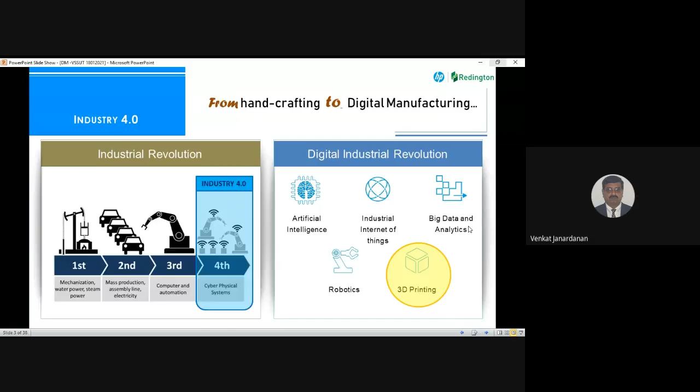All these manufacturing modes will be available, and people started realizing the value of 3D printing and recognizing it as another alternate mode of manufacturing today. The growth we were able to achieve, and how we achieved it, is something we are going to discuss. The primary objective of all this is to achieve higher capital efficiency. If I want to save money for the company or increase the profitability of my business, the first thing I need is rapid innovation and to bring products much faster into the market.

Mainly because the market is becoming more and more competitive. It is becoming much more demanding. People are also expecting new products to come into the market at an earlier date, so that they will be able to get it. So if you look at the mobile market, if you look at the speed at which new models are coming up from different companies and how competitive it is becoming, that sets the trends for the market demand today. So the market is expecting that kind of a turnaround of new products into the market.

Second way of achieving capital efficiency is basically shorter delivery time. When I start a project, earlier days, if you look at the time of Ambassadors or all these cars, there is a design time which is much longer. And after completing all the design, they will manufacture the tools which are required for mass manufacturing. Then they launch the product, and the next batch of product or next modification of the variant of the product comes after a very long time, mainly because it takes a longer time for really setting up the plant, getting to the manufacturing mode, and bringing the product out to the market. So I think we can't afford to take that much time today to design and deliver a new product or new series of equipment.

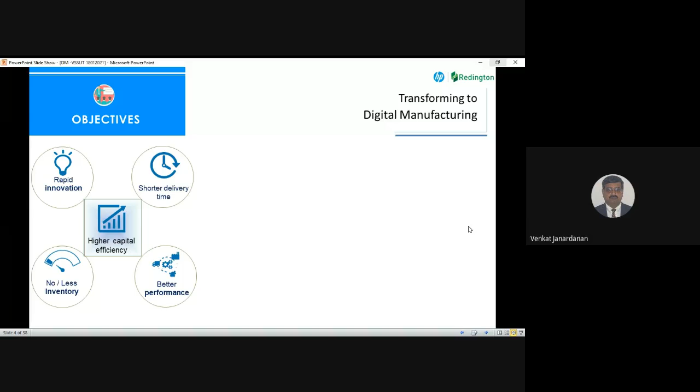So today, if you look at it, people are moving away from standardization. If you look at the time of Ambassadors and all this kind of stuff, we have a standard model, and that model is getting sold in the market. Today, people are speaking about customization and personalization. So more focus is getting shifted into customization and personalization. Second thing is basically heavy devices into ergonomic and lightweight devices. If you look at the evolution of electric cars or something of that kind, what we are looking at is basically making it as lightweight as possible, so that we will have the maximum efficiency achieved out of the system.

Third is the manufacturing constraints. When you are doing a design using injection molding or CNC or any other alternate manufacturing, what happens is basically you have to design the product for its manufacturability. So for example, if you look at injection molding, we have to really put a lot of effort in getting the right flow patterns while we are doing the molding, or draft angles have to be defined in such a way that we will get the maximum quality for the product. So there are design constraints with you.

Or if you are looking at CNC machining, we need to think about which machine is going to manufacture this, whether it is a 5-axis machine or a 3-axis machine, and my design has to be in line with the manufacturability of that part. So all these constraints have to be removed at one point of time. We need to have a free-form design. So that is something which people are looking at today, because I cannot work with constraints. I want to work freely and do designs freely. So the market today is transforming into these stages, and that is where 3D printing is going to add a lot of value for you in the whole scheme of things.

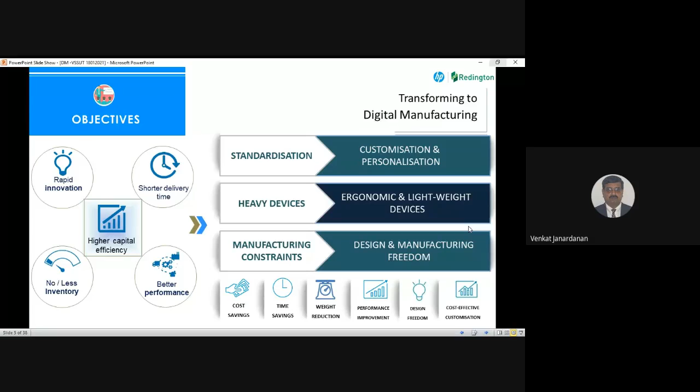Now, if you look back, these 3D printers have been available in the market for almost 25, 30 years. And these 3D printers are commonly also called rapid prototyping, and also called additive manufacturing. So all these terms lead to one thing, basically a layer by layer creation of your 3D part. That is exactly what 3D printing or additive manufacturing or rapid prototyping is about.

So if you look at a CNC machine, what we are doing is actually taking a block of wood, subtracting the areas where we don't need it, and creating a geometry out of that box. Here, what we are doing is we have a 3D model, and if you slice an apple and rejoin the slices like this, the geometry we get is an apple, right? Similar way, we are taking a digital 3D model, slicing it layer by layer, and constructing it layer by layer, one over the other, and creating a 3D model out of it.

That is the way the 3D printer works. So it is a layer by layer construction from the bottom or from the top, where the geometry is achieved by adding layer over the layer to get you the 3D Z axis direction. So that is what is called additive manufacturing.

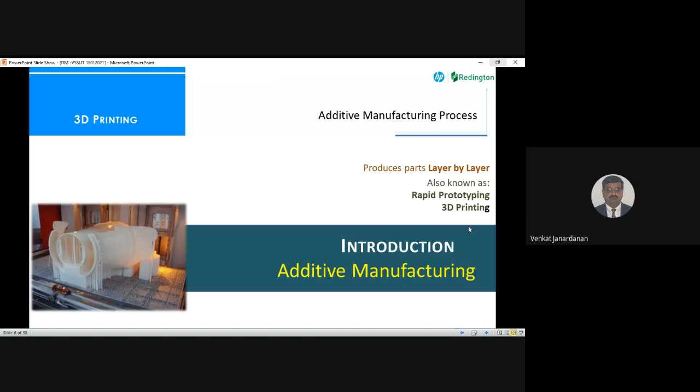Now, if you look at the history, this is available from 1986 when Charles Chuck Hull invented this SLA technology, and he commercialized it in 3 years' time, and he started a company called 3D Systems. Then came the FDM, the most commonly used 3D printers, the fused deposition modeling 3D printers, which came in 1989, and after that, technology over technology started coming in, and the latest technology which is available right now was launched by HP in 2017. That is basically what we call the multi-jet fusion technology.

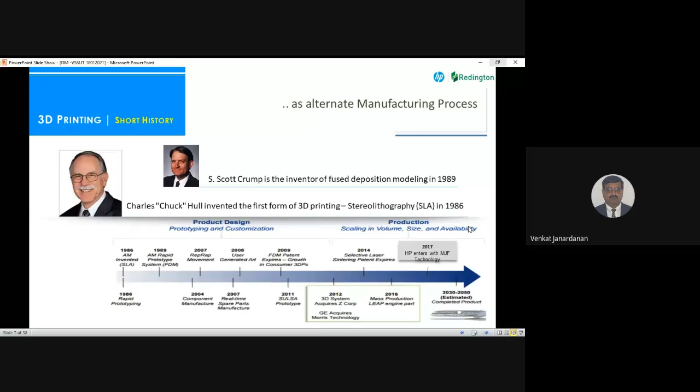So we have seen a lot of new technologies coming into the market. The basic nature is layer by layer construction, and each has its own characteristics and different way of thinking. So if you look in a little detail into the industrial 3D printing technologies available in the market, we have the FDMs, we have the polyjet, that is basically jetting technology after inkjet technology came in 2D printing. If you look at FDM, what they do is a fused filament is getting deposited using a tool path.

Something like in a CNC machine, a tool will remove the material from a block of material, whether it is aluminum or steel or plastic. So the same tool path is followed, but instead of removing the material, it just keeps depositing this material, like when you create a jalebi. You're just creating a layer over the layer and creating the jalebi. Similarly, the FDM extrudes the material wherever the material deposition has to happen. It follows a tool path and deposits it. That is the technology called fused deposition modeling.

When you look into polyjet, what it does is basically like an inkjet 2D printer. In the inkjet 2D printer, you will be jetting the inks wherever it is required, whether text or image. It jets the ink at that location, the specific color, and creates the drawing or the text on the sheet of paper.

In this case, it jets the plastic material, and there will be a lighting source which goes across the platform, and it photocures. A photopolymer is getting jetted, and the UV light which passes through will polymerize the material, and it will become a solid material. And likewise, layer by layer, it creates a 3D model. MJP and polyjet are similar technologies, only two different terms from two different manufacturers.

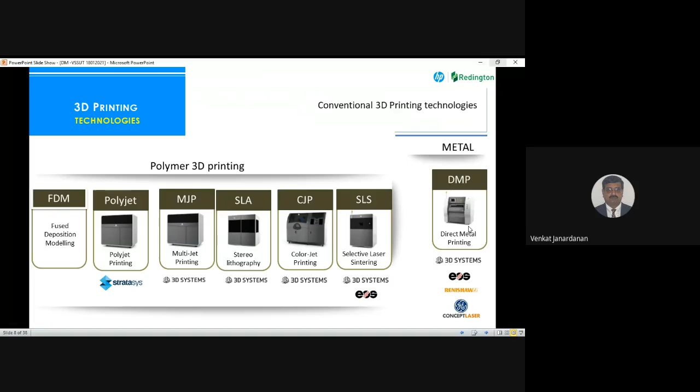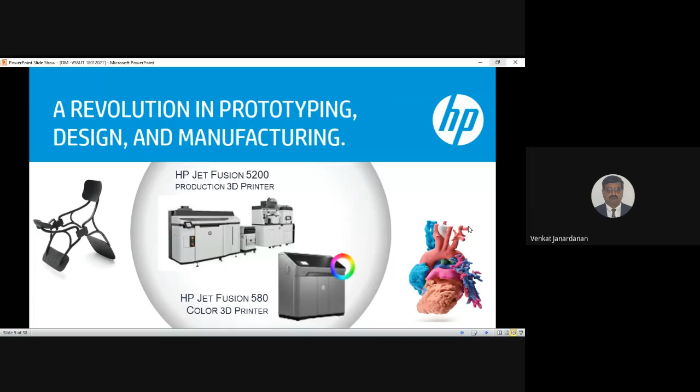So what HP has done is HP came up with a combination of these technologies in 2017. When they launched, they leveraged their expertise in inkjet technology. They use the powder-based technology for just getting the powder. So instead of a laser beam, HP uses the inkjet technology to put something called a fusing and detailing agent, and wherever the fusing agent is getting deposited, that area melts and will become solid. So they have brought in a hybrid technology, multi-jet fusion technology, which is available today and which is the latest of the 3D printing technologies available in the market.

So the advantage of this system is that it is the fastest of the technologies because it needs to spray a layer of powder, and across one movement of the print head, you will have the parts generated. So basically it is what we call a page-wide technology in printing. Then we don't need a support structure, because if you look at PolyJet or SLA or any other technologies, FDMs, they need a support structure because the spraying or deposition of material cannot happen in the air.

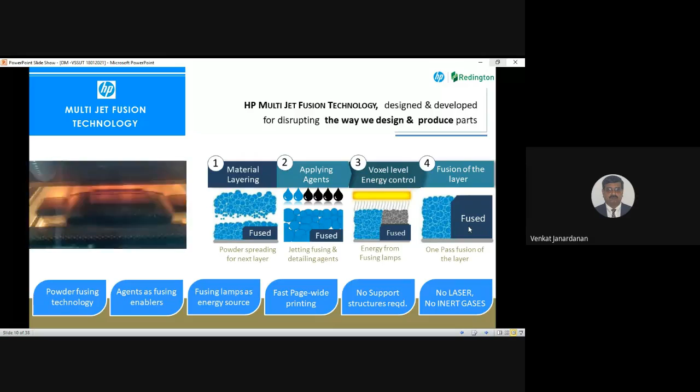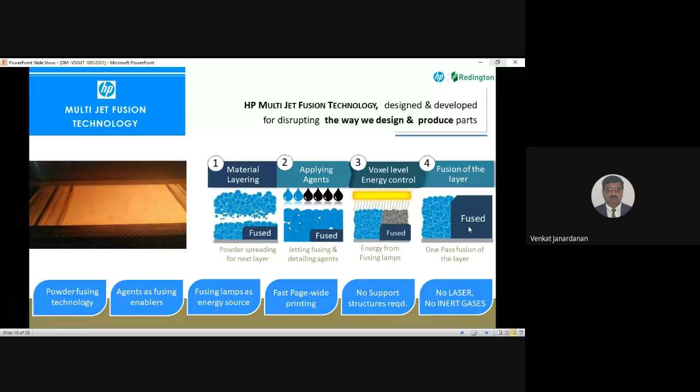Here in this case, since the powder bed acts as a support, we don't need a support material. And unlike the SLS system, we don't need a laser since we are not using any laser or high power equipment. We don't need inert gases, because when the laser goes and sinters the powder, there is a chance of explosion, so we have to fill the complete chamber with inert gases like nitrogen or argon. That is totally avoided here. So this technology has become a very simple technology and the most suitable technology for increasing the speed of production. That is one of the reasons why digital manufacturing has really picked up in the market since the emergence of this technology.

Now, if you look at the machine, this HP 3D printer gives you very strong, durable parts, which are as good as your injection molded parts. Earlier, if you look at SLA technology or PolyJet technology, it is not really using a thermoplastic. It uses thermoset plastics, and the plastics are not that strong to be used as an end-use part. For example, if I want to print a part and use it in a car as an interior or in an aircraft as an interior part, or for packaging, or really use it for the end function, that may not be possible with the PolyJet or SLA technologies because these are all epoxy plastics and not real thermoplastics which you use for engineering manufacturing.

So this technology gives you really strong durable parts which are suitable for end use, and it also gives you isotropic parts. What I mean is that in the X, Y and Z direction, the strength of the part is going to be the same. If you look at FDMs or other 3D printing technologies, since they create layer by layer and there is a time gap between the layers, the bonding between the layers will not be as good as your injection molded part. But this technology is quite comparable with injection molded parts because along the Z direction we will also be able to achieve the same strength. That is why they are called isotropic parts.

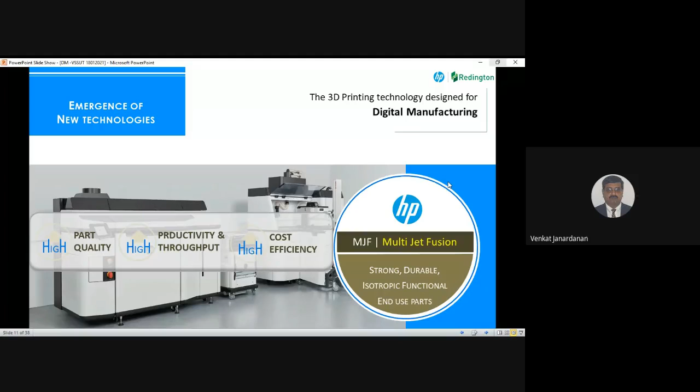Now, this equipment has also been designed for high-speed and high-volume printing. They designed the equipment as 3 different components, and these 3 components make the system usable 24/7 uninterrupted. For example, the printer's job is only printing. We have a separate unit called the processing station which handles the powder, and the build unit is the interface between the processing station and the printer. So if I have multiple build units, I don't have to stop the machine. Once one print is out, I can take out the build unit, insert the second build unit, and start printing the next job. So uninterrupted, I will be able to generate output from the printer directly. That is one of the reasons why the throughput is very high on these machines, and it is the most suitable product for your production environment.

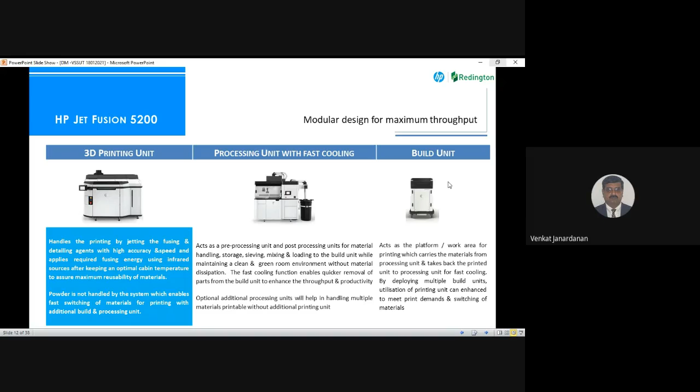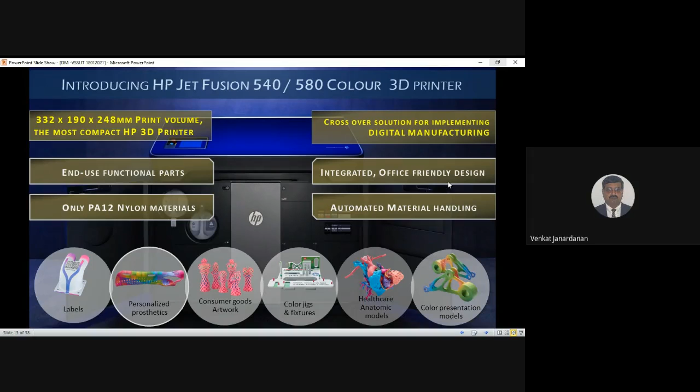Now they also have a color printer, the 580 series, which gives you a true color picture. So HP leveraged their technology in terms of getting the color combinations right on the parts, and millions of colors can be generated by mixing CMYK inks. The same technology they use for 2D printing, they have deployed here also with the color agents, and you will be able to generate color parts out of this machine.

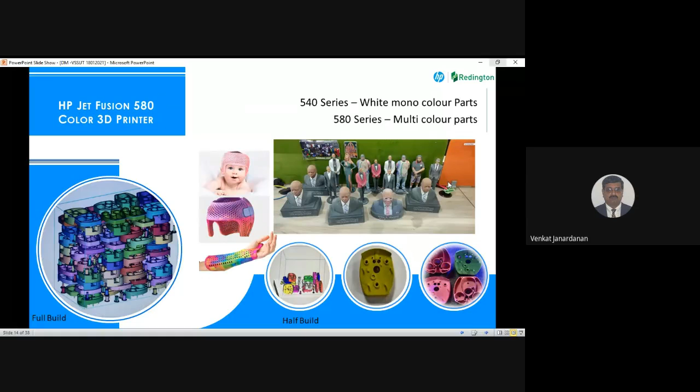So if you look at 3D printing, there is a revolution happening today where we are getting strong parts out of this printer. We can also generate true color parts from this, and these parts can be used as your complete 3D manufacturing printer.

So why we are able to really analyze these competitive technologies and speak more about the 3D printers is mainly because as a team in Redington, we have the complete range of 3D printing solutions available in our office. For example, I have all three series of printers from HP on sale available, where we are using them for production in our facility.

We also have an SLA machine, an SLS machine, a few FDM machines, a polyjet machine, and a multijet. So whatever technology we speak about, except for the metal 3D printers, I have the complete range of 3D printers available in our facility, where we are quite experienced in operating them, seeing the benefits, and we also interface with customers to see the merits of each type of 3D printer.

That is one of the reasons why we can authentically say this printer can do this job, this printer cannot do this job. We are able to tell you mainly because for over a decade we have been using these machines, and we have been using HP machines for the last 3 years.

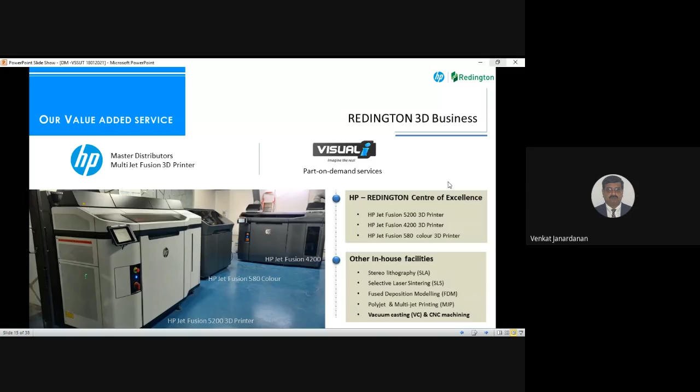Along with that, we also have vacuum casting, the conventional rapid prototyping tool, and CNC machining. So we have a setup where we operate a production environment in our office, and we are able to speak more about all the technologies mainly because of our experience with all these series of 3D printers.

Now, from our experience, what we could see in the market, conventionally in the last 25 to 30 years that 3D printers have been in the market, most customers have bought these 3D printers only for prototyping jobs, mainly because the speed and throughput are not good enough for their production jobs. Second, the part quality and the material don't suit, because polyjets, SLAs and these 3D printing technologies will give you prototyping parts, only for look and feel and not as functional parts.

And the value proposition: the production cost of most of these technologies is much higher than your normal production cost. That is one of the reasons why we are not able to port these machines to a manufacturing environment, and for the last 20-25 years they have been lying in the prototyping market. Today, what we are speaking about with HP is a drastic change in the way we approach the market, and we are speaking about digital manufacturing using these new technologies.

For example, look at the speed and throughput. HP, with the modular design, in 10 hours is able to manufacture a complete full bucket. And as the number of parts increases, it will not impact the time of printing.

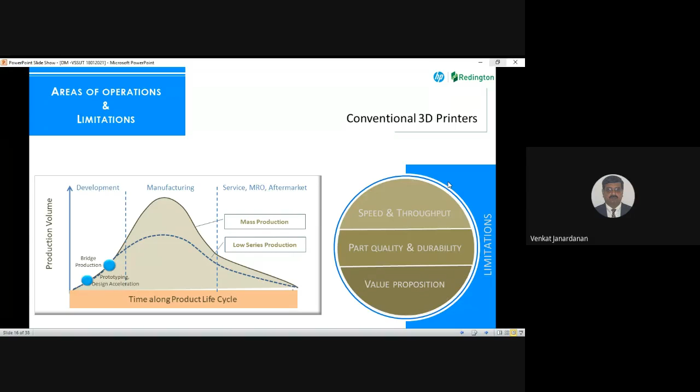Now, what the market is also looking at is, say for example I'm launching a new product, I want to understand how the market is going to respond to that product.

I don't want to commit myself into crores of investment for the tooling. So what people are thinking about is, let me launch 500, 1,000, 2,000 parts now in the market. Let us see how the market responds. In the meantime, if I want to do some improvisation on the design, my designers can also do the improvisation as per the market demand.

And the next 3 months, or next 6 months, 8 months down the line, I can invest on the tooling and enhance my production once the market demand increases for my product. So that is something which the market is really thinking about now, because if I want to launch a product after tooling, I have to invest crores and crores of rupees. But if I can avoid the tooling part of it and do a soft launch with these designs 3D printed, that will end up much more economical for me.

So if it is successful, I can always switch over; the same design can be ported after making some tools. If it's not a successful model, I can supply the 3D printed spare parts in the market. I can change the design and relaunch the product with a new design, and as per the success, I will be able to generate tools accordingly. So likewise, with a lower risk, with a lower investment, if I am able to launch a product, that is the best way of doing it.

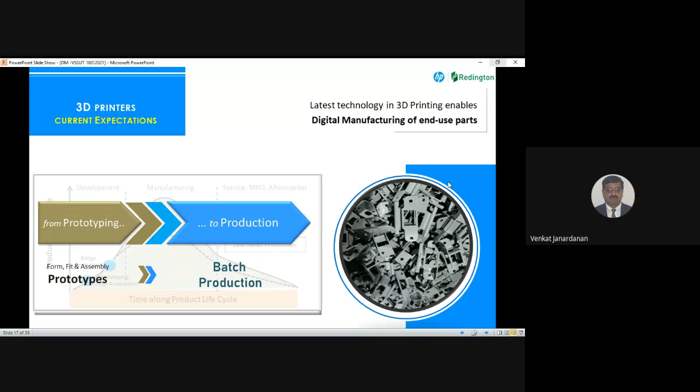Now, to get a little detail into this, the applications which we can focus on are basically personalization and performance optimization. I have launched a product. I need to relaunch that product with some improvisation or performance optimization. I can do that using 3D printers. Or if I want to really do a generative design using lattice structures and optimization of the design using the software tools, I can do that and get it printed, which may not be possible with conventional manufacturing.

If I want to have only a few thousands of parts manufactured in a year, for example, in tractor manufacturing, there are tractors which may sell 30,000, 40,000 in a year. A few variants, for example, a few demand an air-conditioned chamber for the tractor. It may sell only 2,000, 3,000 a year. So the air-conditioned part can be digitally manufactured rather than getting into the tooling, where the HVAC can be designed, 3D printed, and on demand manufactured and fitted onto the vehicle. As the volume picks up, I can always go for the tooling.

So likewise, if I want to have variants, or improvised designs to launch into the market, I don't have to get into the conventional way of manufacturing by investing on tools. I can always go with a 3D printed part for a certain volume, and then switch over to mass manufacturing mode whenever required. So the value addition we are going to give in the industry is basically low volume production, complex designs and geometry, integrated designs, and creating a value proposition for that kind of components. I am not speaking about a part manufactured in millions, where tooling will be the most economical way of manufacturing.

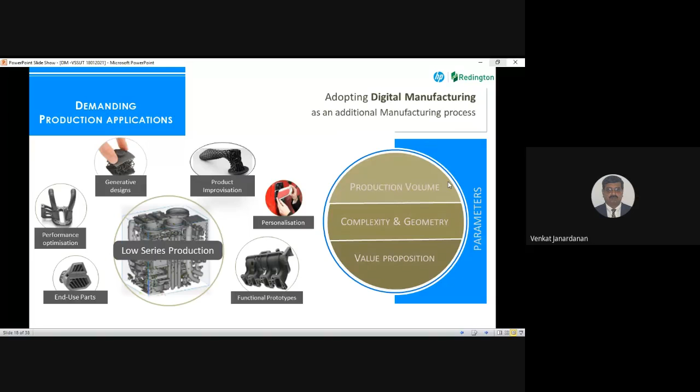Now, if I want to really get into a transition to digital manufacturing, as I told you, each and every component of my product cannot be manufactured in 3D printing because it may not be viable for you to do that. So what we are speaking about is basically you have to have the right technology as per your demand to manufacture, depending upon the material, depending upon the speed at which you want it, the volume of parts or the number of parts you have to manufacture in a year. According to that, you may have to really choose a technology for that.

Second most important thing is, don't try to put everything into 3D printing. Whatever you feel is commercially viable, make the design modifications which are required for that. So depending upon the application, depending upon the design, you can choose which manufacturing mode will be more economical for you.

And third is basically, normally in the prototyping market, I will design some products or some components or child parts for manufacturing in injection molding. And then, since soft tooling or mold and production might be a long duration job, or might be more expensive, I will share the design to the market and ask them to get a 3D printed part.

And when I get a 3D printed part of a design which has been designed for CNC machining or for injection molding, what happens? The design is done for something else, and the manufacturing mode is something else. So the value proposition will not be right. So if I decide that these are the components which I am going to do using 3D printing, then why can't you design it for 3D printing? Why do you want to design it for alternate manufacturing and then print it?

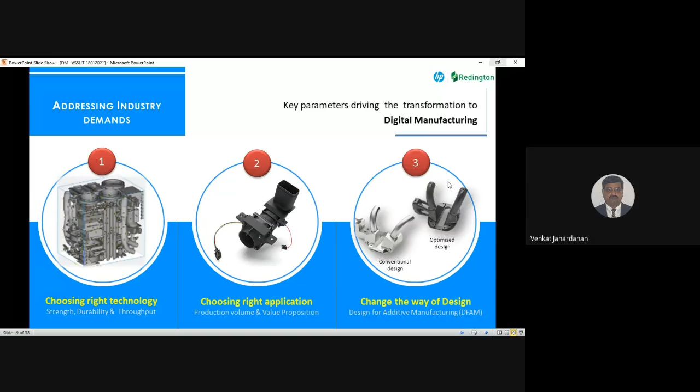So spend some time, modify your design for 3D printing as per the parameters of 3D printers, and then start producing those parts using a 3D printer. Then you'll be able to establish the value proposition, mainly because of your design changes, probably a material saving, probably some sort of part consolidation. All these things are possible when you start designing for 3D printing. So these are the three key areas which I am going to discuss in the coming slides.

So what we are speaking about is choosing the right application. When you choose the right application, what are you designing? Is it basically a functional prototype where you want to do the testing? We have done some projects in the market where almost 300 cars were running with all the inside lock assemblies and outside lock assemblies 3D printed, because they wanted to do a pilot launch or test run of these vehicles across the environment and see the performance of the engines or of certain components.

So they have done a new platform of design in a car, and they have opted for 3D printed parts wherever they can fit, so that they don't have to go for soft tooling, to reduce the cost of this pilot, these alpha beta launch parts, or what we call development parts.

Similarly, for example, if I want to personalize certain components in my car, or I have a complex geometry for better circulation in my car as per my demand, and I want certain numbers, 1,000, 2,000, 5,000, 10,000 to be printed, I can choose those parts and port them onto this.

Or for example, a company like Ford or Toyota, where Endeavors or these kinds of vehicles are not sold in millions. Endeavors getting manufactured might be around 20 or 30 in a day, where it will not be viable to do the tooling and manufacturing of those low volume parts. So what they do is start importing the parts from the global market. They can avoid that, and they can have the design printed and use it as per demand.

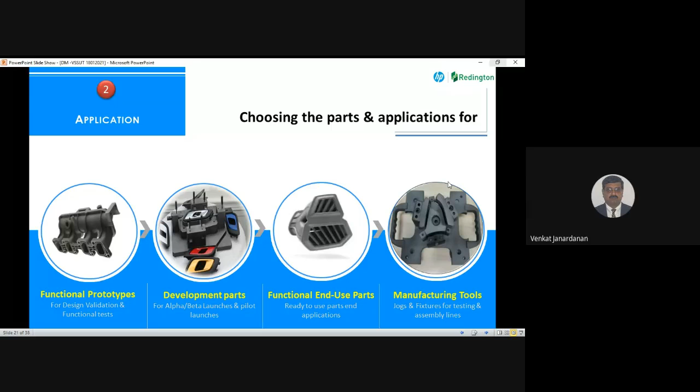Most of these tools you see in the production line are over designed. Can we remove that or replace it with a plastic 3D printed fixture, or an assembly tool, or jigs and fixtures? That is another market which really opens up for 3D printing as a digital manufacturing mode. These are the areas we are focusing on, where we feel that with the emergence of HP 3D printers, we will be able to create a really good impression in all industries using these applications.

You can see the number of parts being made over there. For example, on the right side is a truck IP, the instrument panel, where they wanted to launch 10, 15, 20 trucks for a test ride. You don't have to go for tooling. You can always go with this kind of manufacturing process. In the middle is a checking fixture for your petrol tank lid, where we have done the design. On the left side are the lock assemblies and other components we have done.

The video playing now is a gripper used for a robotic arm. For example, if I have an aluminum gripper, you can assume it will always be an assembly of multiple parts, because machining complex geometries is not possible on a CNC machine, and it will be an assembly fastened together, and the performance will depend on that. You need a lot of maintenance and all this kind of stuff.

The gripper shown here is a single component designed and printed on a 3D printer and works on a pneumatic structure, because as I told you, HP parts are much better compared to any other technology. HP is the technology which gives you airtight, watertight parts, so the functionalities can be operated pneumatically or hydraulically.

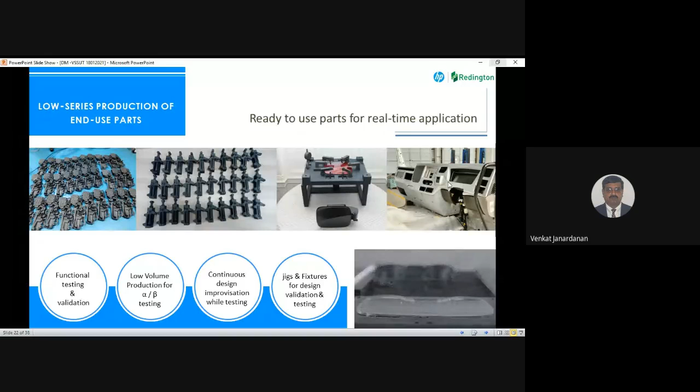The benefits are not only the economy of printing or economy of production, it also reduces the carbon footprints into the market, because I don't have to use this kind of equipment and heavy material. I don't have to really do a lot of post processing and all this kind of stuff. So what happens is basically faster turnaround, as well as for the environment, as well as for the person who lifts the parts and operates on an everyday basis. He will also have less fatigue.

So if you look at the manufacturing tools, whether it is a checking fixture, assembly fixture, or operational jigs. For example, if you are doing painting in a paint shop of an automotive car manufacturer, what happens? You have to keep your door open for doing the painting. So there will be a jig provided, which will be in aluminum. And over the aluminum, they will do some sort of coating of rubber-like material or glue some rubber-like material, so that scratches will not happen on the body.

So likewise, they do a lot of this, and they will take a lot of pain in generating that jig itself. Here, it's a simple task: do an optimized design and use a plastic jig which is good enough to just keep the door open for painting. So likewise, when you walk across any factory, you can see over-designs. You will see inconvenience in the production, mainly because of your current way of thinking and designing.

So, for example, if you look at this end of arm tool, it is completely driven using pneumatics, single print, single assembly, no assembly. It is basically a single unit, works the way you want it. So this is an innovative design which somebody has done and printed on an HP machine to get it implemented in a factory line. So similar is what we are speaking about when you speak about the designs and implementation of this kind of manufacturing tools.

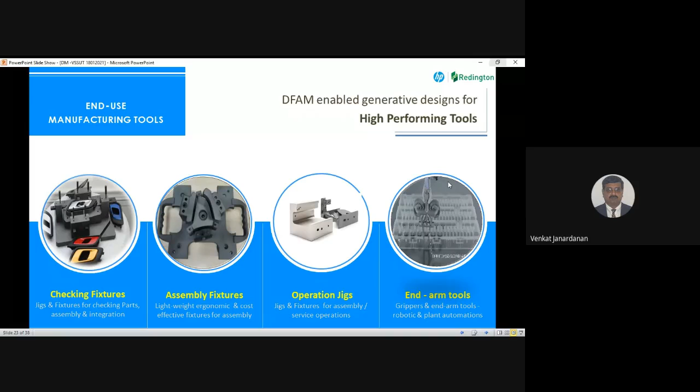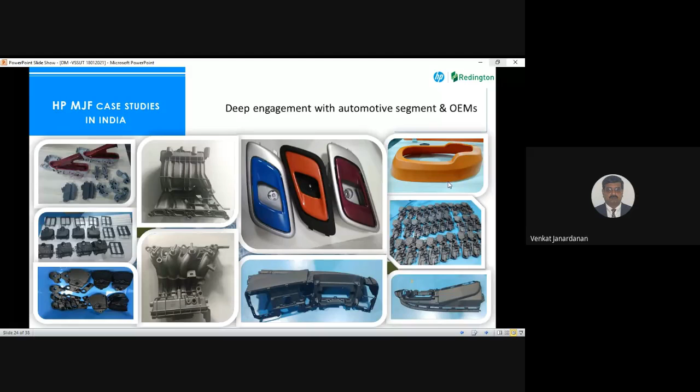Now, if you look at any automotive company, we have done a lot of activities in the automotive industry, because that is one of the predominant industries who uses 3D printing for manufacturing. And we have done a lot of jobs in the market for this kind of thing, including manifolds, external, internal parts, everything. Now, the key component which an educationalist or someone like you has to think about is basically optimizing the design for 3D printing, or changing the way you design it.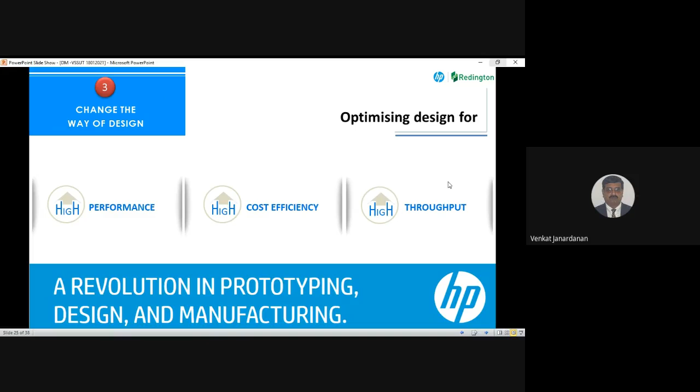For example, when I do an injection molding design, I always get into draft angles and all these components, which are required for designing a component for that. If I go for a CNC machine, depending on the machine availability, I need to really think whether the tool changes, the tools are available, enough access is available, whether I can reach out. My part should not have any undercuts. So like this, I will be working with a lot of constraints.

In this case, in 3D printing, I can do a freeform design. I can manufacture any complex geometry. I can insert lattice structures. For example, I want to make my equipment or tool lightweight. On the boundary or external surface, I can have a solid, and I can think about a lattice structure inside so that the weight of the part will come down. So likewise, I can do designing like topology optimization, part consolidation, lattice structures. I can consolidate all the parts and make it a single assembly to get the functionality.

Or one of the key important things is design for packing. For example, if you are using a draft angle of injection molding, I may be able to manufacture 10 parts in the bucket available. But if I change the draft angle slightly, I will have tighter packing, and the number of parts which can get printed might be 20. So I can adjust the design to enhance the packing and get maximum throughput from one print job. Likewise, I can think about all these parameters when I decide that this part is going to get printed in 3D printing, and I need to design the job for 3D printing.

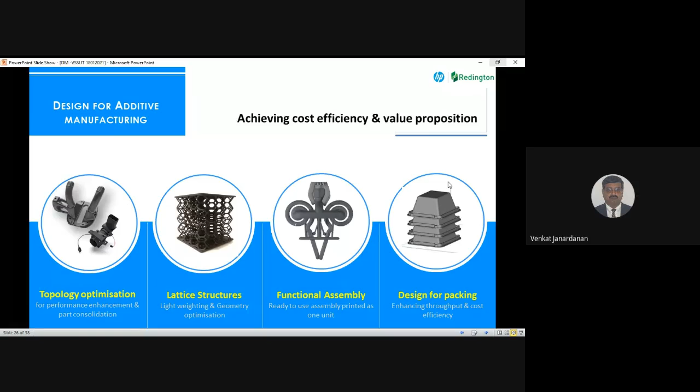For example, if you look at part consolidation, this typical part which I have shown here, if I go for injection molding, it will have minimum 10 parts. It will be an assembly of 10 parts, and you should have separate part numbers.

You should have separate tools to manufacture that, and you have to really maintain the stock of all the 10 components for a long run. Here in this case, all these 10 parts are consolidated into a single unit, printed as a single part, and it carries a single part number for your design. And this is one of the components which is getting used in our HP 3D printers itself.

On the right, it is basically a component which HP uses in their production line to remove the sludges from the printhead manufacturing area, the silicon sludges which come out in the drilling process of a printhead. What it does is it sucks out the silicon and throws it away. The initial design was a 575-gram aluminum part with 8 components fastened together, and every time the sludges would accumulate in the path and there would be blockages. They had to do frequent cleaning.

With all the challenges in front of them, they designed a component to optimize the performance and the design in such a way that it has become a 52-gram part, and this can be printed on demand. So when this part is nearing breakage, just at that point of time they can print the design and use it. So they don't have to stock this either.

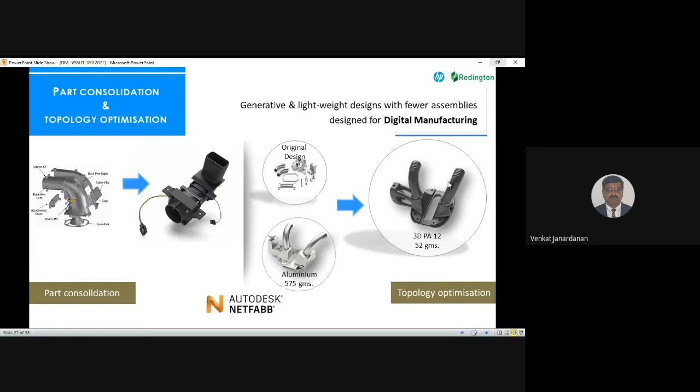Similarly, the packing on the bottom is basically a clip-like fastener which is used in the electronics market, a cable type. When we printed it in the original rectangular shape, the number of parts that could be printed was almost 120, 130 in the bucket. But I added some living hinges to the design, straightened it and started printing. The result was almost 500 parts. So with a small change in the design, my throughput multiplies 5 times. That is the way we can really manage throughput by optimizing the packing.

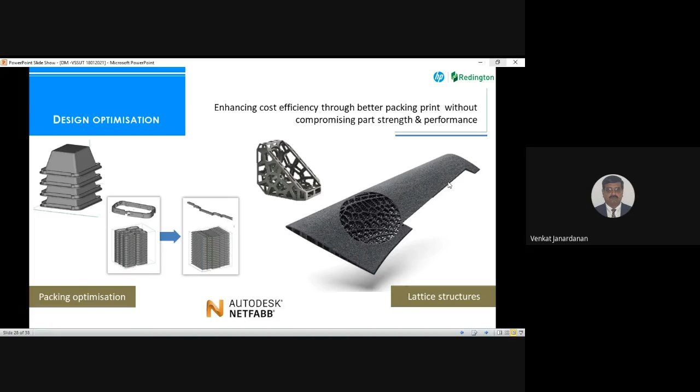On the right, I have shown you lattice structures which can be incorporated to reduce the weight. These tools are available in all your CAD software. You can do design optimization using a CAD module like ProE or CATIA, or do these lattice structures in the software available. Autodesk Netfabb has very specialized software for that. We have Magics from Materialise, also very specialized for this. Altair has got software for that. So there are multiple software options in addition to the platforms you have, like ProE or CATIA, and you can use the tools to optimize your design and make it a much more economical way of manufacturing.

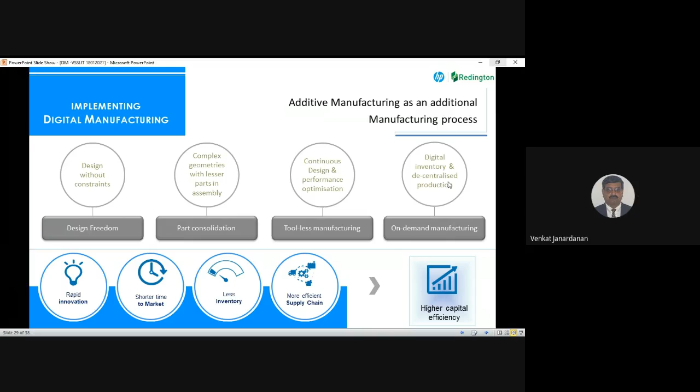So in conclusion, if we want to achieve successful implementation of digital manufacturing, first you should have the right technology. Second, you have to choose the right application. And third and most important, you have to change your mindset in the way you design your components. If you design your component to enhance the performance as well as the throughput, that is where you achieve higher capital efficiency through digital manufacturing.

So personalization is the key here. It should be a personalized thing. Or if we want to have standardization, I cannot do a standardization like an automotive or something like that. I can do a mass customization, like from an age group between this and this, there is one model. Size this, the size this. So some sort of mass customization can happen, but it cannot be a mass manufacturing. It always needs a short batch production. So this is one of the industries where 3D printers are going to be the most useful thing for them

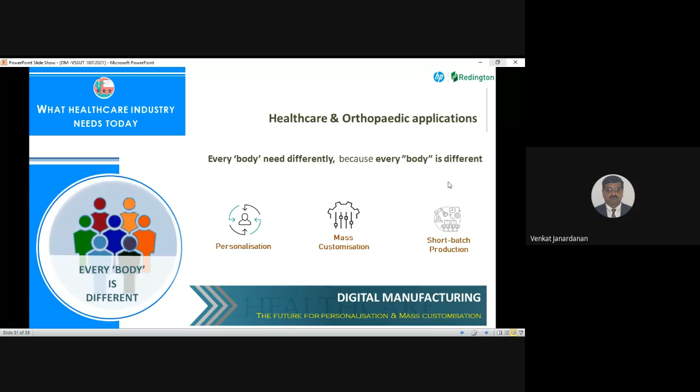So likewise, if I can really work on prosthetics and orthosis, which is personalized for my hand, design is personalized for my hand, production is by 3D digital manufacturing, and I will get the functionality I require, that is locking the movement of that hand, that can always be achieved using this kind of orthosis and prosthetics. So it is completely a personalized equipment which you have to do.

Then anatomical models for surgery planning or education, or probably post-surgery safety gears. For example, if I have a surgery and I want to protect the movement or restrict the movement of certain areas in my body, or I need to have a protective gear put across, I can have a personalized equipment basically for that.

For example, earlier days, our grandmother used to rub your head when giving you a bath every day and create the shape for your head. Today, we don't have time, we don't have the expertise to do that job. So what people are doing is, at different periods, they will keep printing the helmets for the kid every time, so that when he falls down or hits somewhere, there is no injury happening to the head. At the same time, the head grows with a definite geometry or shape. So these kinds of applications are getting used in the industry today.

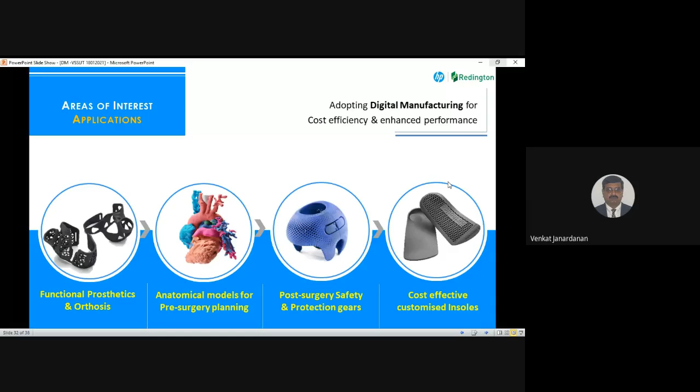If you look at our experience in April, when COVID broke out, when the PMO decided to go for ventilators all across, they assigned a startup company called AgVa in Delhi to manufacture 10,000 ventilators. And we were manufacturing parts for them in the past because their manufacturing volume is almost 100, 200 ventilators a month. And we were supporting them with the manufacturing of almost 12 components for every ventilator they launched in the market. So during this COVID time, we were assigned the task of printing almost 1.2 lakh parts for 10,000 ventilators and delivering them in 30 days' time.

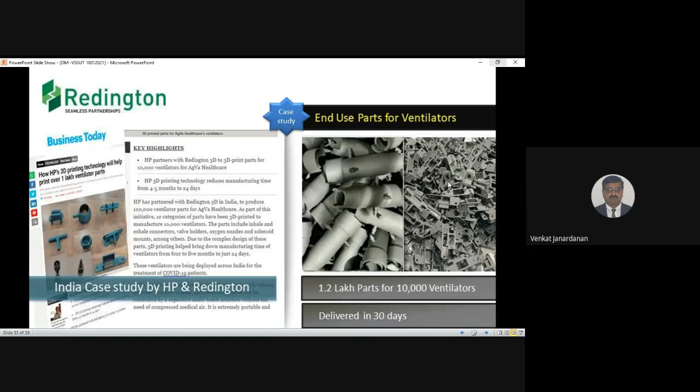And we were able to achieve it mainly because we had these two HP production machines, which run 24/7. And with the human restrictions and operation restrictions because of lockdowns, we were able to achieve it mainly because the machine never broke down. It was very seamless, and we were able to manufacture all these 10,000 ventilator parts and supply them on time.

Likewise, we are doing this production day in and out with our machines, and we are quite experienced in various applications, where they are getting used, which are the successful applications and which are failure applications. So we are able to help you choose the right application. We are able to help you with the right designs and modifications. We can suggest what kind of design modifications you can do.

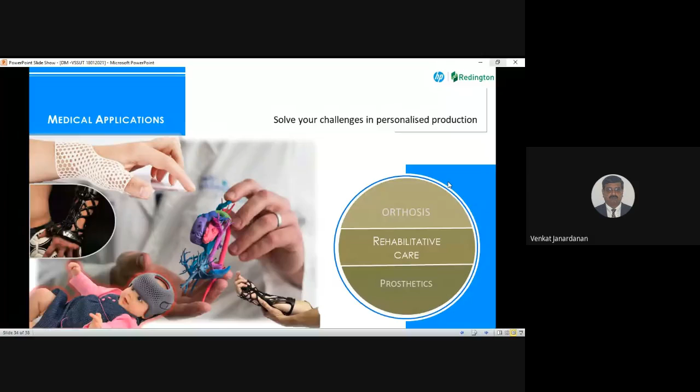So all these things we are experienced in, and that is exactly what we are speaking about, or looking at from an education institute like VSSUT, where the professors can train their students how to design, how to do innovations in the design, how to get it manufactured using digital manufacturing, and what changes we can bring into the industry.

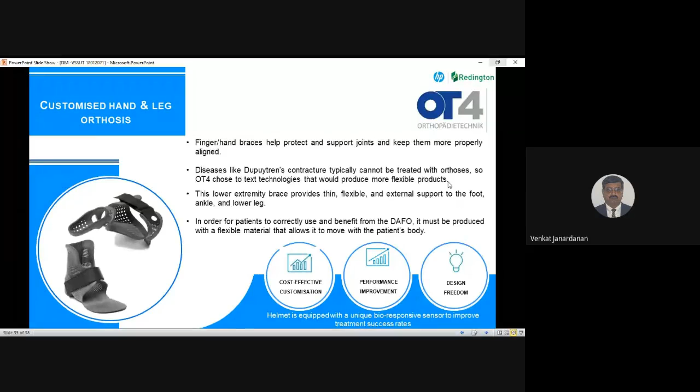Now, if you look at the AICTE curriculum also, I think there is a lot of stress getting done on Industry 4 and its implementation, especially on these areas. And a lot of funds are getting provided to the education institutions to implement these labs and get the skill sets developed with the student community. So this is one of the areas where we would like to work with you.

And if you look at HP also, being an HP premier partner, we have all the solutions basically in this segment, and we will be able to help you to really get it done. So what industry needs is a multidisciplinary workforce, where today you cannot say that I don't know computers, because when you get employed somewhere, they might be using artificial intelligence for decision making.

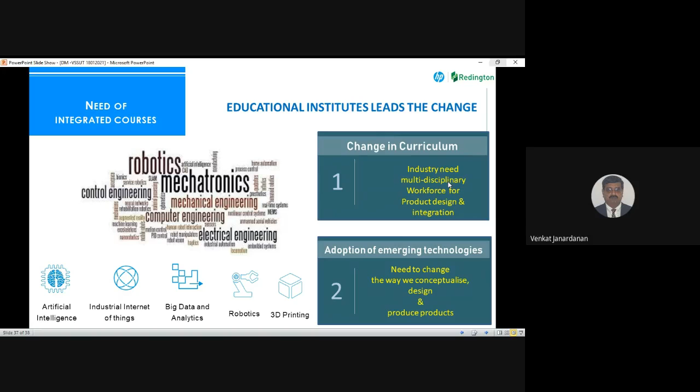They might have IoTs embedded into their conventional manufacturing machines to transfer the data, and they may have big data analytics implemented there with the robot automations and digital manufacturing. So mechatronics, electrical, mechanical, everything is fine, but today the skill set is required with all these interfaced together, because end of the day, in a factory environment, people are looking at something like this.

When COVID time came in, we had a good run because people started buying laptops, mobile phones, internet lines, they started storing data in cloud, they started sharing data from home. So the product, the design doesn't stop. Designers were working at home. The design job activities are happening. Production line was happening with the minimum people as per the government restrictions.

And today we are able to implement it mainly because we have a complete network where we have the complete system ready for us to really have a cloud system. We have an analytics system. We have people who sit at home and analyze the data, designers working at home designing. There will be a minimum team working in the production line. So this is what is going to be the future after the implementation of Industry 4, where cloud, IoTs, big data analytics, artificial intelligence, 3D printing, everything is going to get integrated together for your manufacturing environment.

This is my last slide. So if you have any questions, we can take up the questions for the next 10-15 minutes.